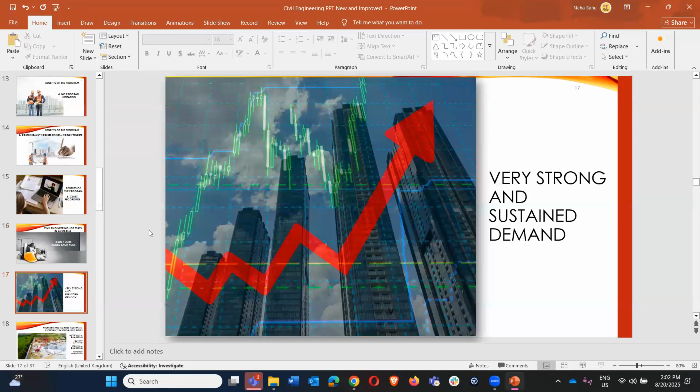Now we are going to the most important part of the presentation. Speaking about potential job opportunities, civil engineering in Australia is experiencing robust growth, driven by major infrastructure investments and ongoing urban developments. The sector also adds about 4,000 new jobs each year, according to my research while preparing for this presentation. This clearly reflects a strong and sustainable demand for professionals in this field.

Civil engineers are in very high demand across Australia, especially in specialized roles such as geotechnical engineering, quantity surveying, structural engineering, and transport engineering. Across Australia, the demand for civil engineering also varies by state and territory, closely linked to the scale and scope of ongoing infrastructure projects.

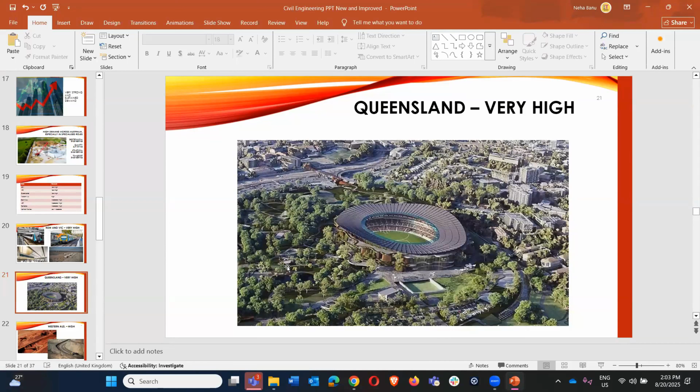In New South Wales and Victoria, there is very high demand, driven by massive developments such as the Sydney Metro, the Western Sydney Airport, the Melbourne Metro Tunnel, and the Suburban Rail Loop. In Queensland, there is also very high demand, fueled by the infrastructure boom and preparations for the 2032 Olympics. And in Western Australia, major investments in regional roads and mining infrastructure are also contributing to a high demand.

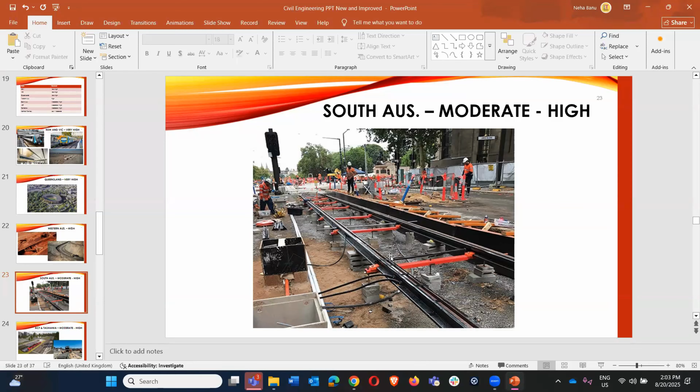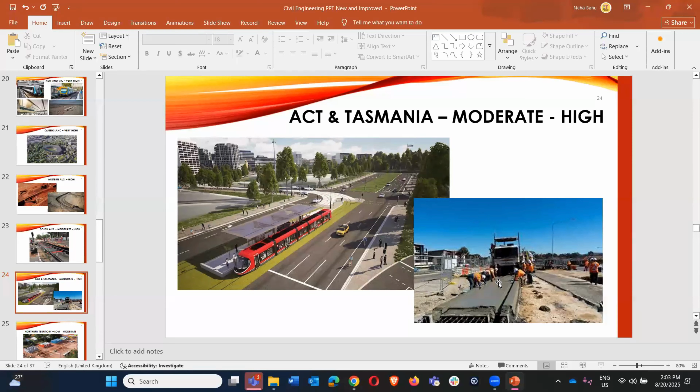In South Australia, there is also a moderate to high level of demand, thanks to ongoing urban renewal and transport upgrade initiatives, especially in Adelaide. In ACT and Tasmania, there is moderate demand, mainly supported by projects like the Canberra Light Rail and regional bridge works. And lastly, in the Northern Territory, there is low to moderate demand, attributed to smaller scale infrastructure efforts shaping the marketplace in these areas.

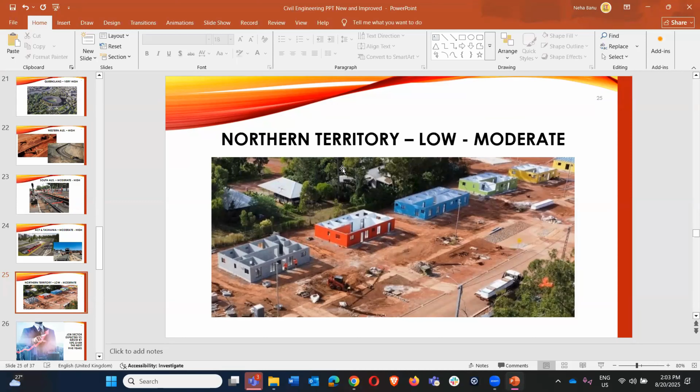Civil engineering is among the highest paid engineering fields in Australia, especially for experienced professionals involved in large scale infrastructure projects. The sector is expected to grow by 10% over the next 5 years, providing a strong prospect for career advancement and skill development. Moreover, the sector is supported by ongoing government and private investments in infrastructure, which ensures continued job creation and sustainability.

Now we will be talking about why to choose Extratech. Obviously there are tons of free YouTube courses, Domestika courses, Udemy courses, even Skillshare courses. So in light of all this, why should you even bother with Extratech? That's a good question. Let's answer why Extratech is the best.

Number one, the curriculum is created by industry veterans. Our course is designed by experienced industry professionals who have in-depth knowledge of the field. The main advantage of this is that it ensures the program covers only relevant and up-to-date topics, providing you with practical skills and knowledge that are in demand in the job marketplace at present.

Number two, the principal foundation of the program is to help international candidates. The program's core mission is to support you. We acknowledge the unique challenges you might face in job hunting and adapting to a new working environment. Obviously, the international hiring process is completely different from the local job hunting process, and interviews and meetings are even harder. As international candidates, navigating all of this can be super difficult.

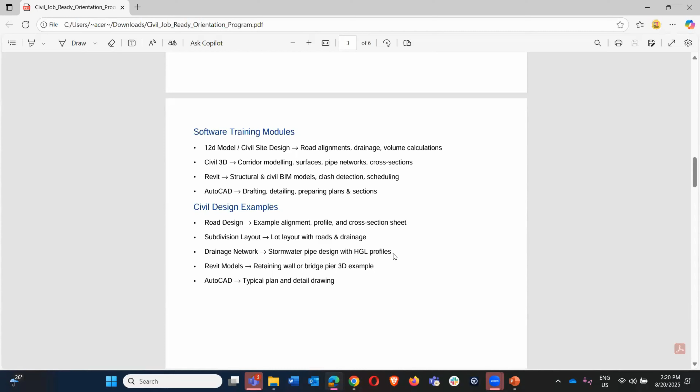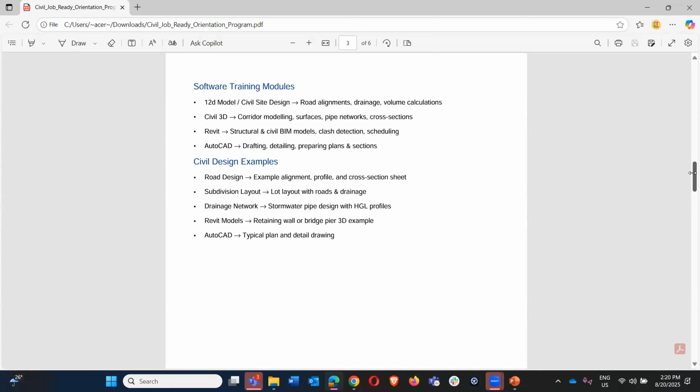Then there are project management modules. I'll teach you the basics of project management, both theoretical knowledge and practical application. The first one is work breakdown structures - how a work breakdown structure works.

Project scheduling, Gantt charts, cost estimation, resource planning, and how you can communicate and report using PMBOK guidelines. PMBOK guidelines are mostly used in Australia for project management, and we'll be learning about that.

We won't be physically using total station and GPS since we don't have that gear on site, but I'll teach you the basics so you have an understanding of surveying. As a civil engineer, you need to understand basics of surveying - not as a surveyor using total station and GPS, but knowing the concepts: how to set out, how to level, how to gather survey data, what surveying techniques and guides Australia uses, how to create surfaces out of points and break lines, and all those sort of things.

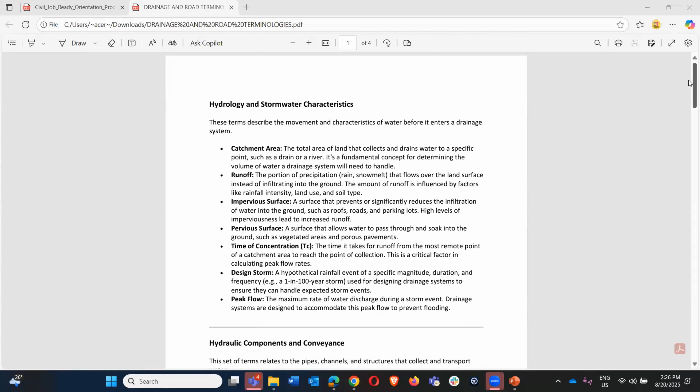Especially in road design and stormwater drainage design, these are the terminologies used. So catchment area — obviously what's a catchment area? It's an area where there's a specific low point where water drains, basically the lowest point where water will drain. So that's a catchment area.

Runoff, basically, is when water flows on the land surface instead of going inside the soil, infiltrating the ground, or seeping into the soil. It helps in the calculation of flow — that's what's called runoff. Runoff is calculated from the rainfall intensity, land use, and soil type.

An impervious surface is a type of surface where water can't infiltrate — basically a concrete surface, road, parking lot, all those kinds of surfaces are impervious. Water runoff is a lot more on impervious surfaces.

And what's a pervious surface? Obviously, it's the opposite of impervious, where water seeps into the soil. If you pour water onto soil or sand, the water gets inside there. So that's what's called a pervious surface.

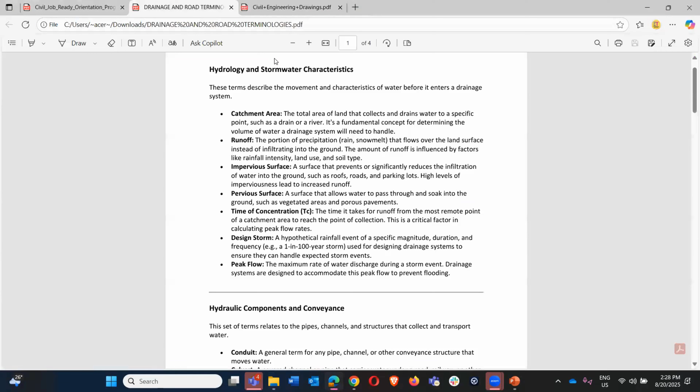Design storm — let me give you an easy example. Design storm is normally referred to as a 1 in 100 year storm, meaning one storm of that magnitude happens in 100 years. I'll explain this and then we can move on to the engineering drawing.

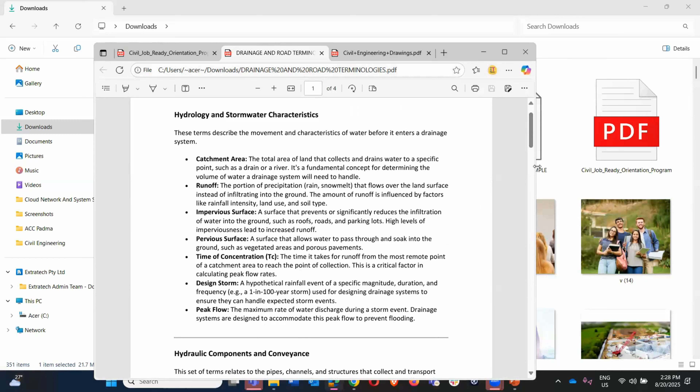So design storm basically means a 1% probability of having that storm. Before it was called 1 in 100 years, but now it's called 1% AEP — that means a 1% probability of having that much rainfall. So we assume that much rainfall will happen and design accordingly.

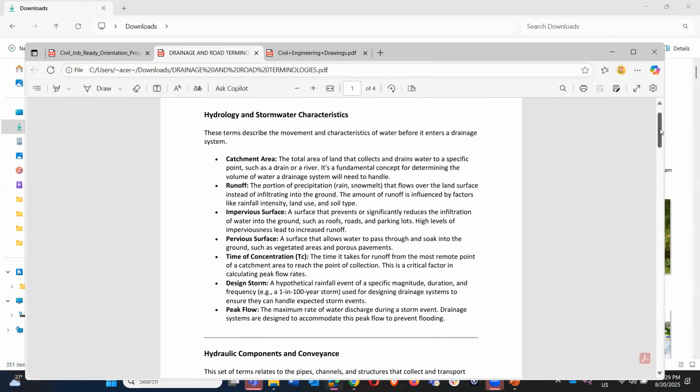And peak flow — peak flow means the maximum flow happening during a storm event. Okay, so yeah, those are the types of things we consider.

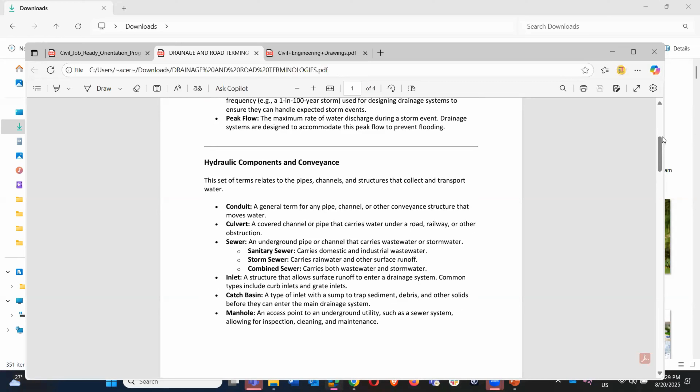Now a bit about hydraulic components. Conduits — I guess a lot of people know about conduits; it's a pipe, channel, or other structure which helps in moving water. A culvert is a type of channel or pipe — it might be a pipe culvert, box culvert, or other types — but it helps in channeling water under a road, bridge, or railway line, without obstruction, basically channeling the water.

And sewer — what's a sewer? Most of you know it's an underground pipe that carries wastewater, and sometimes it carries stormwater too. It's categorized into different sectors: sanitary sewer, storm sewer, and combined sewer — it explains itself with the name.

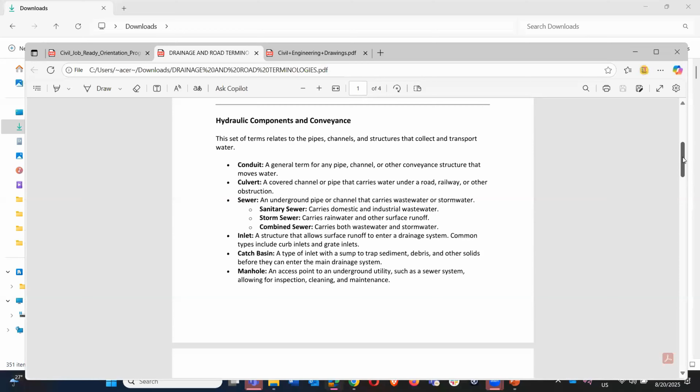Inlet — what's an inlet? It's like a pit where water flows inside and channels through to an outlet. And catch basins — it's a type of sump which helps trap sediments, debris, leaves, twigs, and other solid materials before water enters the drainage system.

Manhole — you've probably seen a lot of manholes, like round structures on the road or on the footpath. It's an access point that helps in inspection, cleaning, and maintenance. These are just quick examples; I don't want to go through all of them since there are a lot. I'll provide and explain more on this as well.

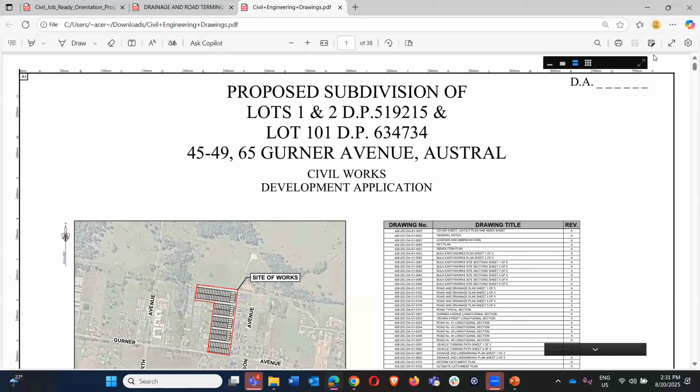But what we can do now is go into the drawings, and I'll quickly show you how it looks — basically how the design and drafting looks. So this is a subdivision layout, a new subdivision layout where a greenfield area has different lots built in it.

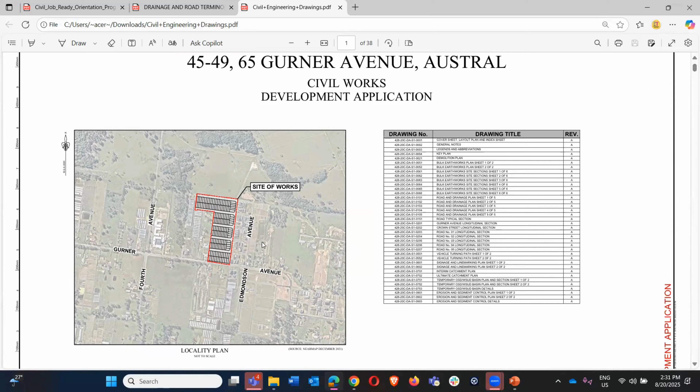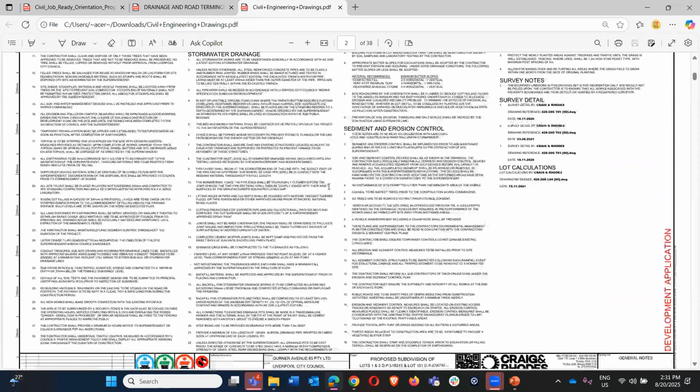So greenfield area means an area where nothing is there, it's just grass. If you go down, we can see here there are a couple of notes here. The first page is the cover page and the second page is the notes page, with notes regarding the project itself.

If you go down a bit, there are abbreviations and legends. These legends explain what the lines mean, what the labels mean, and all this.

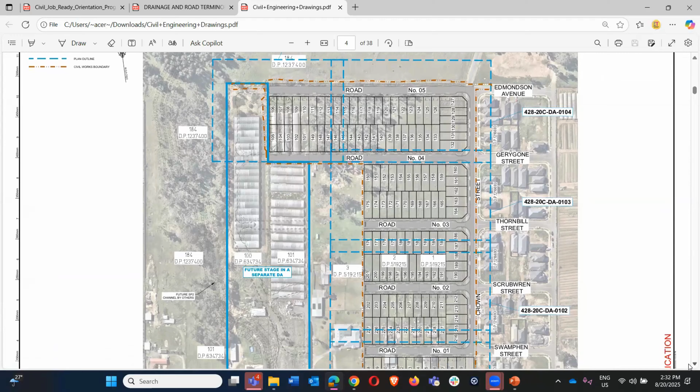Here on the fourth page, it explains about the layout. This is basically the general layout, divided into different stages. Each stage is built at a different time, so you can't build everything at once. That's why it's staged in different numbers, and you build it, as well as design it, at different times. So that's the stage plan.

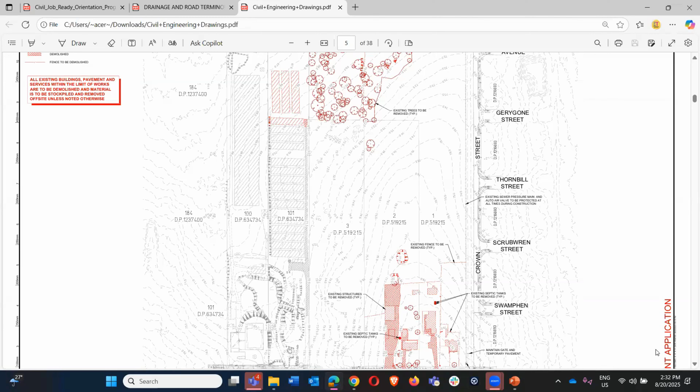This is the existing layout, a survey plan. You get all this survey data from here. You can see the trees, existing buildings, and the contour lines there. It gives you an idea of what's existing and how you can build new things there.

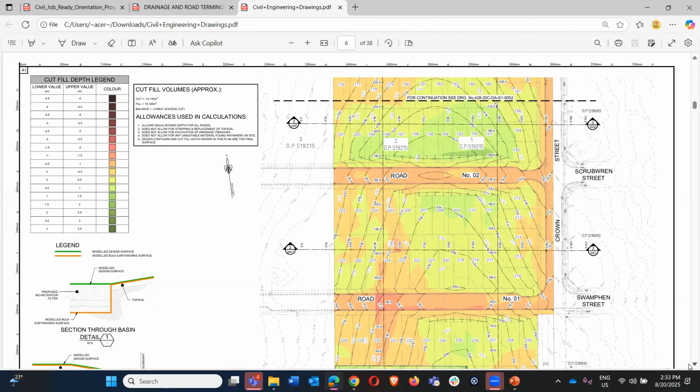If you go to the next page, this gives you a cut and fill area, cut and fill volumes. You can see the color there represents the depth, with upper value and lower value. According to that it's classified, and you can see the total cut, total fill, and the balance there.

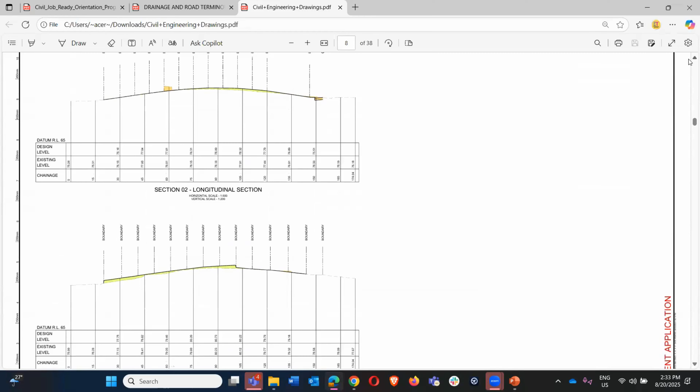If you go down, this is the same cut and fill page. If you scroll down, this is a long section plan. Basically you're getting a long section of a road itself, or a section, where you get all the details of the existing level and design level, as well as the chainage.

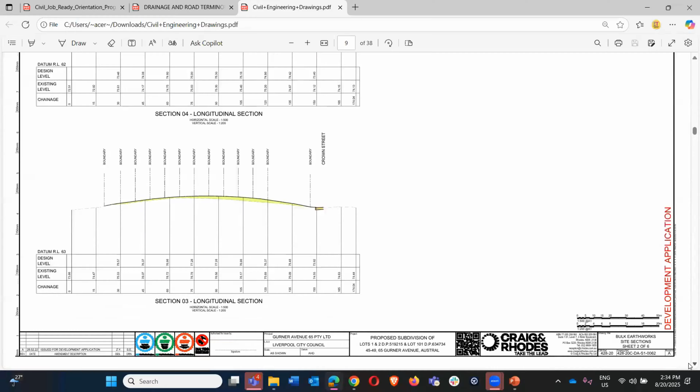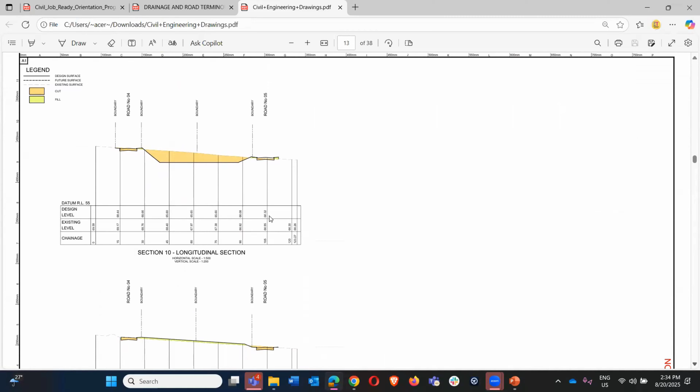That's also a type of long section, showing what's there. For example, here you can see the road, and then the detention basin, and another road there. That's one type of long section. Depending on different areas, there will be different long sections.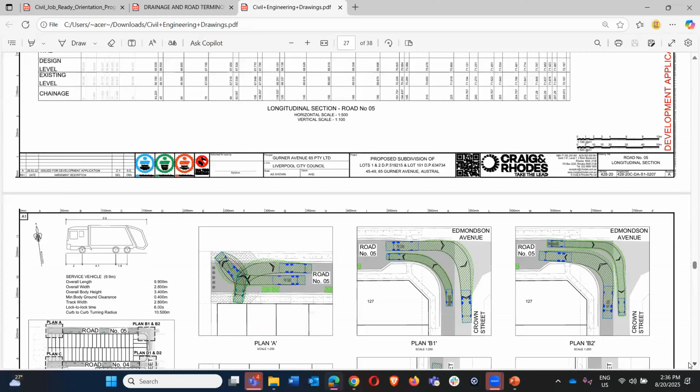If you scroll down a bit, these are vehicle tracking plans - meaning what type of vehicles can get inside the road. Each of these vehicles is different, some might be a bus, some might be just cars. You have to check that before building a road, since you can't just build a road without fitting those vehicles in. So these vehicle trackings are very important.

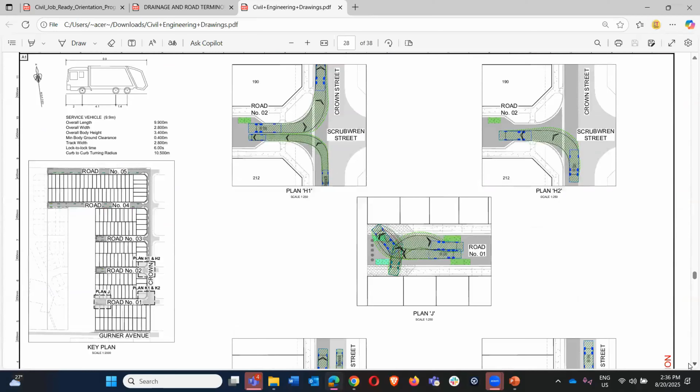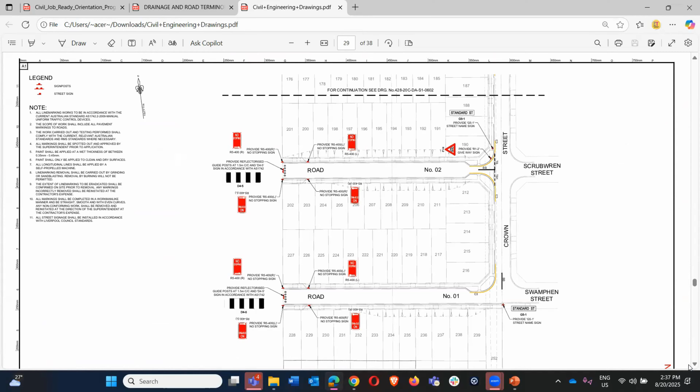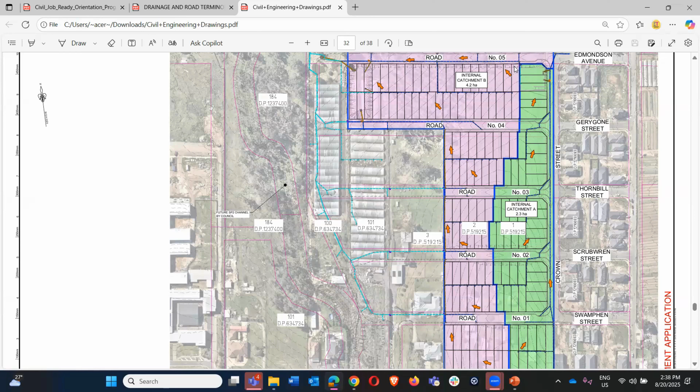So basically, we design it in such a way that all the water flows down into that detention basin. In the top right corner, you can see in the pink box - those are the detention basins, so all the water flows in there. We design it so that all the water flows in there, and the same goes for the green box - it basically goes into a pit near that area, and then joins into that detention basin. So that's what a catchment area is.

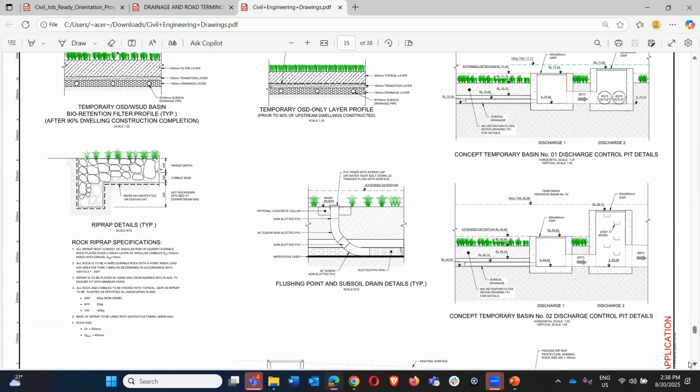If you go down, that's just a section of the detention basin - showing how a detention basin looks, what landscapes you need to put in, and the details of the pits and pipes. Discharge control pit details, basically the details of the detention basin. Yeah, same here as well, if you go down.

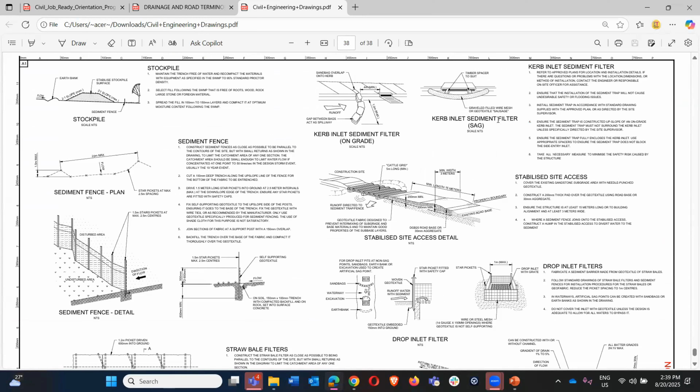Those are just sediment and erosion control plans. These are all details of what's used in the field. You can see that kerb inlet pit there - those types of pits are used in the subdivision itself, along with what fences are used and what type of details are used. We have to provide that to contractors so they can use those details and build accordingly.

I think what I wanted to show you guys was just a rough overview of how a subdivision plan looks. Maybe a lot of people haven't seen a proper plan. So this is a development application. Basically, whenever you want to build something, you have to apply to council and give documents and information about what you want to build there. So you're giving an application, and this is just a part of that application.

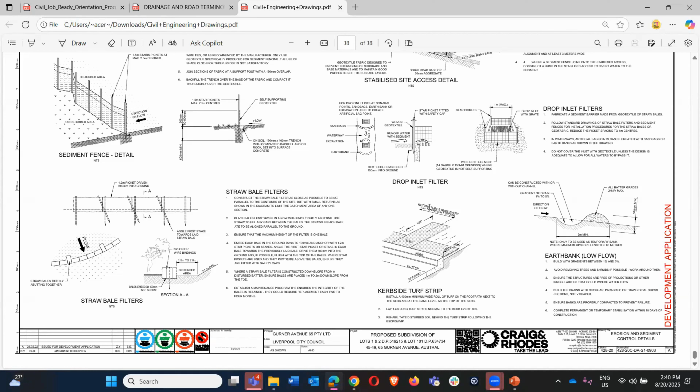So you're given a document, and there will be other documents included as well, but this is just the engineering document, saying these are the details of what we'll be building there. What council does is assess these plans to see if it's feasible, if it's within standards, and then approve it so they can build it. So that's how it works. I hope this was a bit informative.

Now lastly, I just want to show you one more thing. If you go into that standard - AS3500 - if you open that, this is one type of standard. There are different standards in Australia, and this is one of them, mainly used in stormwater drainage design.

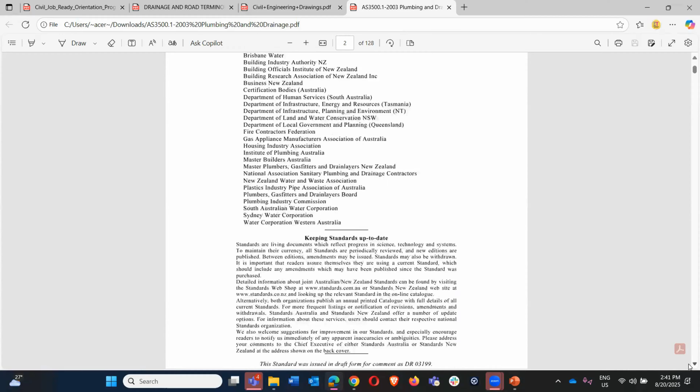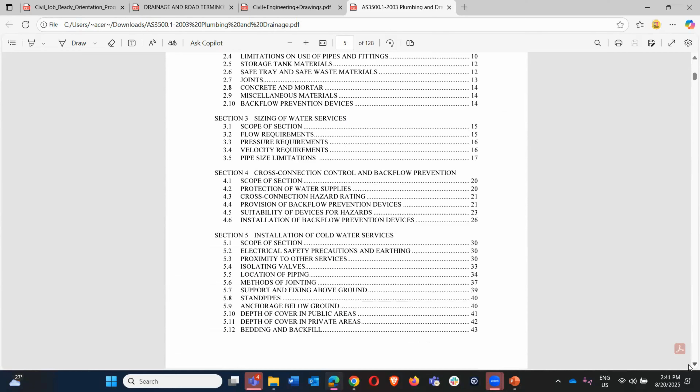If you go into contents, scroll down a little bit - yeah, you can see here, these are the contents. So it shows how you can size water services, what materials you use, what cross connections you can have, and what backflow you can or can't have. All these details are given here, and you refer to these kinds of standards to design it. Also, whenever you're constructing, you refer to these standards.

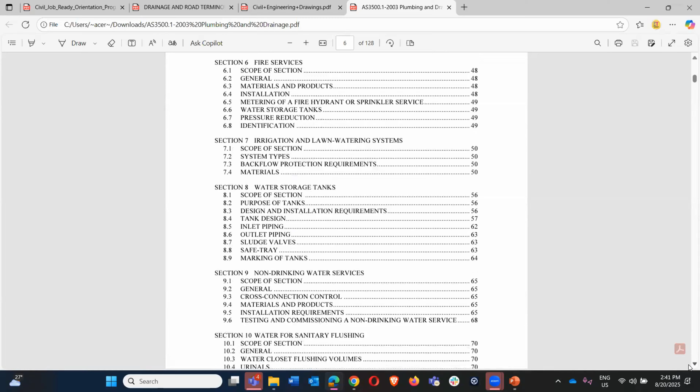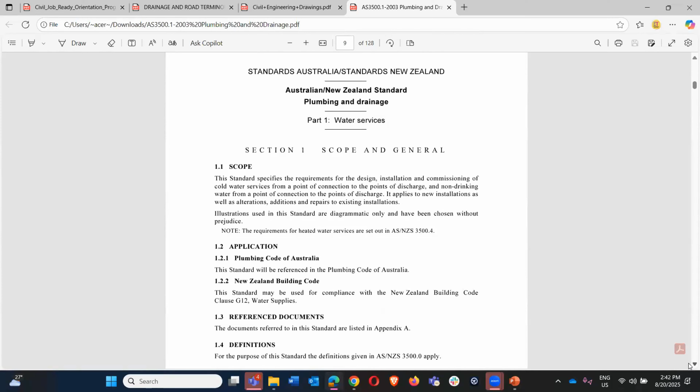So yeah, this is one type of standards. We'll just quickly scroll through. Just wanted to show you guys, because this is not a free document. If you're a student, you can get it for free, but if you're not a student, you have to pay for this and get a subscription to get these documents. Probably most of you guys haven't seen this, so I wanted to show you.

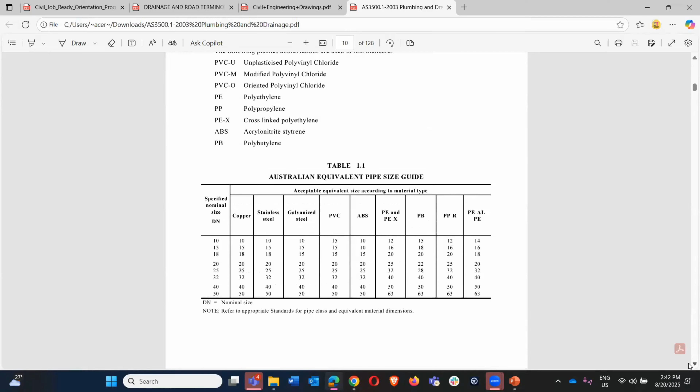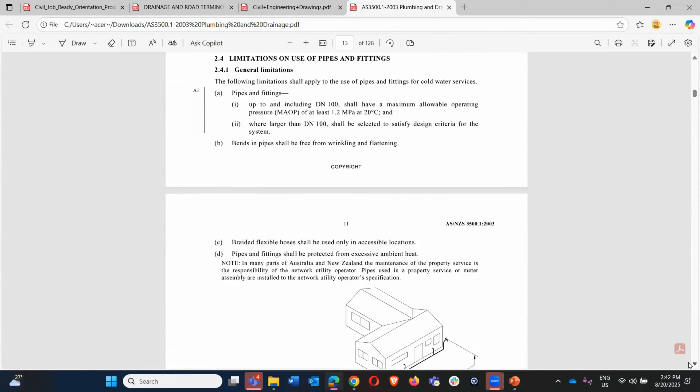If you go down, there are different codes that's used, different, it's a big document. I feel nobody will be able to remember this in one go, but once you're used to it again and again, you'll be knowing it. We'll just go through easily.

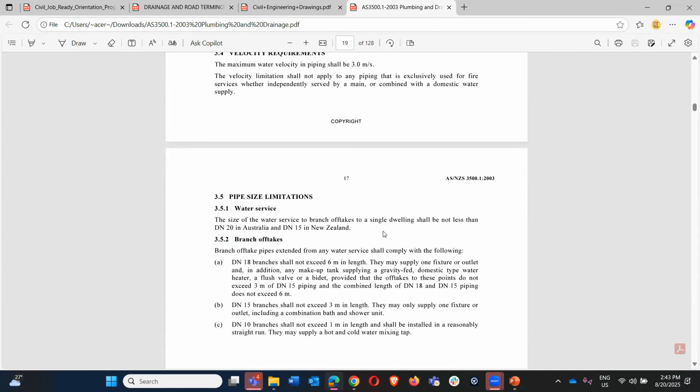You can scroll in the bottom now. There will be references and appendix, so these are the sections. For example, you can see there 3.5, 3.5.1. That's like a clause, section 3.5 and 3.5.1 are the clauses there. That's how you remember the things. You can scroll down in the bottom and we can see some appendix. Just go straight to the bottom.

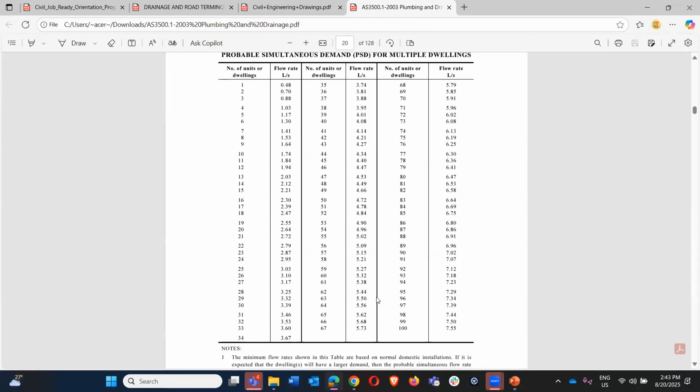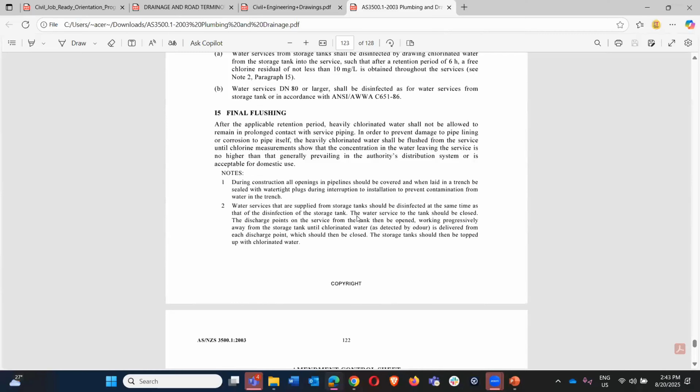Yeah, a little bit up. So yeah, you can see there some appendix there. So what amendment it has, and you can scroll up a bit. That's one of the appendix there.

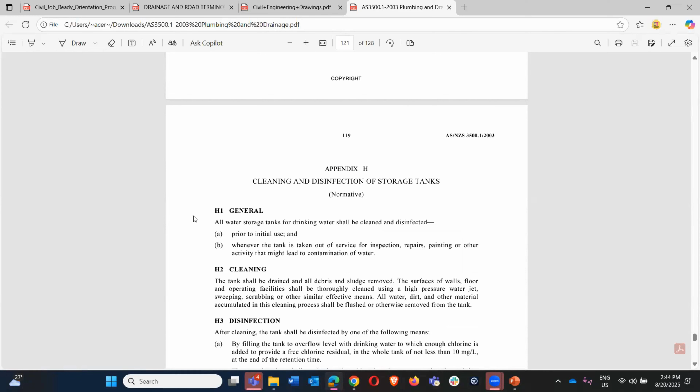So that gives general information. If you want to do any disinfections, if you go down a bit - there you go. You can see there cleaning and disinfection of storage tanks. So you get details of that specific storage tanks from here, how you clean it and how you disinfect it. So yeah, those are the information you get from the standards, and it helps you a lot.

We'll be learning about that more and more in our classes. I just wanted to give you a rundown of that, okay? So yeah, that's there. And the softwares we use, okay? So quickly, yeah.

For example, if you open that detailed survey plan, sorry, detailed survey CSV file, yep. So this is a survey file, okay? So basically, you get all these survey data from surveyors. These are point files, and then you bring them into this software, and then you create a virtual surface out of it. Basically, you mimic whatever you see on the ground, bring it into the software, and you design from there, right?

So first column is like the point number. Second column is X coordinate - you know how we learned in school like X, Y, and Z? That's what it uses here. So X coordinate, third column is Y coordinate, fourth column is Z, fifth column is just a description of what's there, and sixth column is the line number.

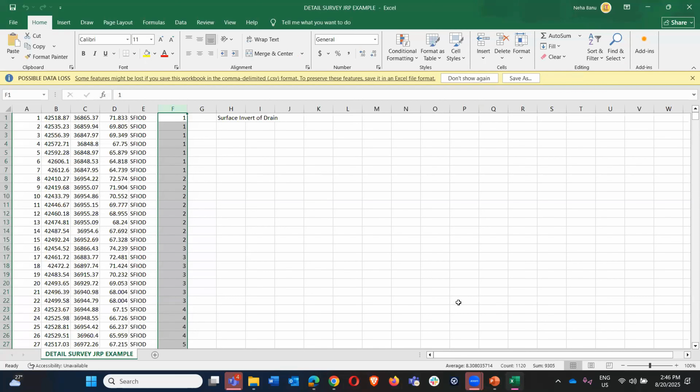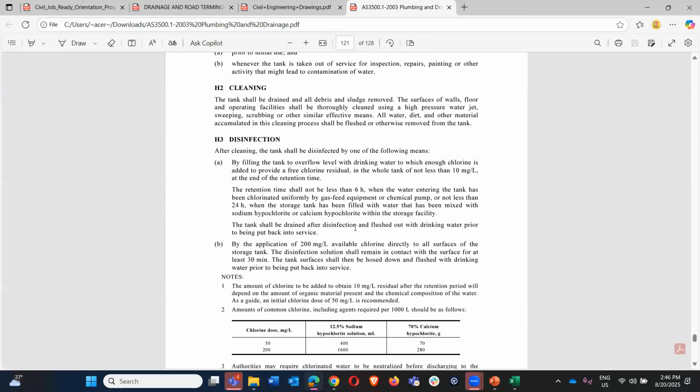What I want to share one more thing is the softwares we use. The most important one is 12D, and I think 12D is really helpful for you guys. It'll help you a lot in finding a job because a lot of companies need experience in 12D, since everyone's busy, so it'll be really hard for someone to teach you from scratch. That's why they want people to know the basics of everything, and that's what we are going to cover.

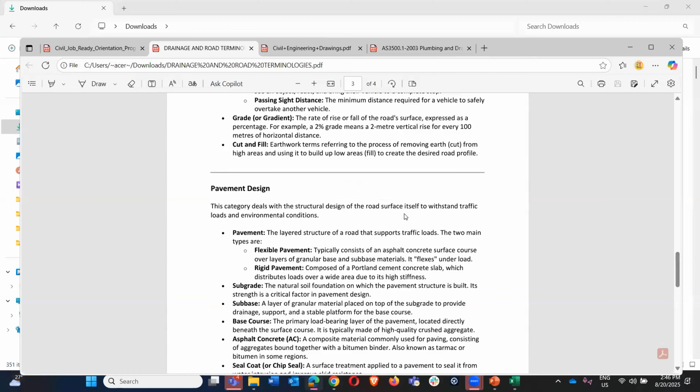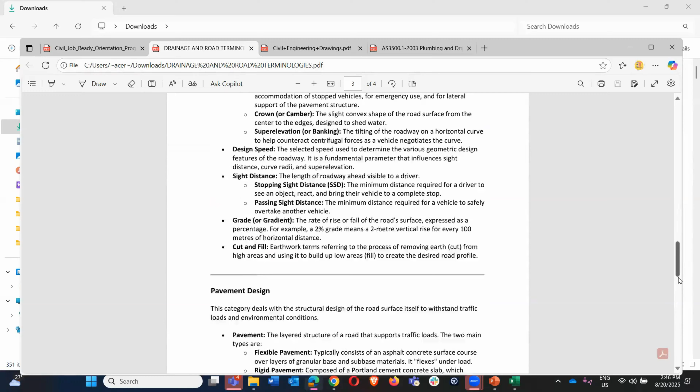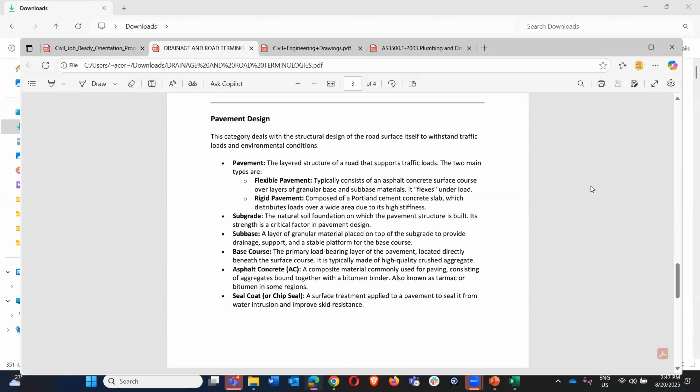I know this sounds like a lot of things here, but we're trying to cover as much as we can in a short period of time so that you have different opportunities in the market. You're not just looking at one area. If you focus on just structural, which most Southeast Asian people do - I feel like people from overseas degrees are more focused on structural, they just think civil is just structural and focus there, which limits their opportunity. That's why I want to teach drainage, stormwater, road design, and structural as well.

That gives you a wider range of job opportunities, right? So I want to focus on that, and I feel I want to help you guys achieve your dreams as well. I was in the same place before, right?

So I understand how hard it is not getting a job. But before we move on to these slides, I just wanted to ask if you guys have any questions about the softwares we learned, Australian standards, or anything at all.

Hey Mitch. Hello, hi, I got a question. Is it enough time to learn all of it? Like all the softwares and everything? See, we're not going into everything in depth, so you don't even need that in depth.

What we are going through is the basics, so you understand the overview of it, and then you can do things, right? That's what makes you capable for entry level jobs. If you're applying for mid level to high level jobs, obviously you need detailed information. But if you're going into entry level jobs, these surface level informations, and the industry knowledge things I teach, will help you a lot. So we can cover most of these.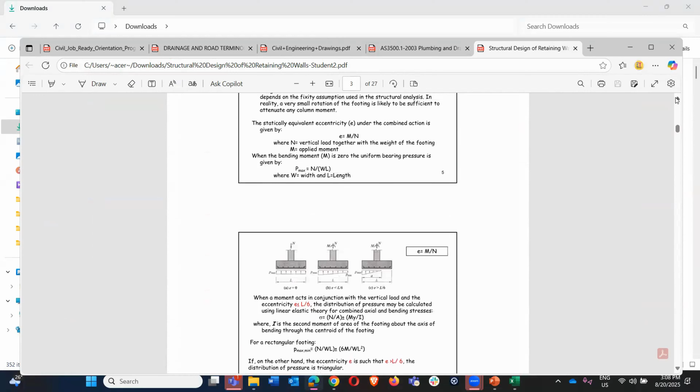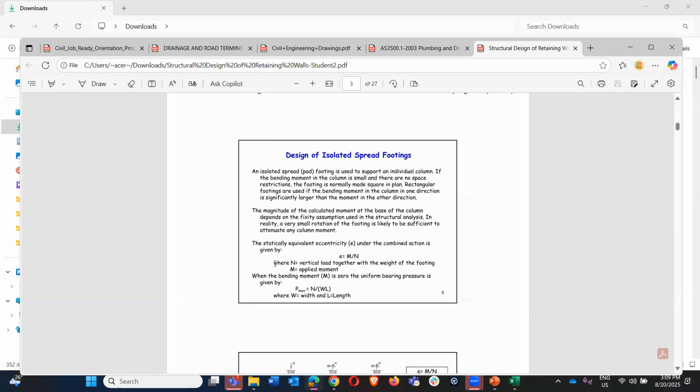Yeah, there, yep, there. So basically I have all these notes here that explain things. We won't go through all of them, because it's all theory and we don't have time, since we want to focus on structural and practical things. So what I can do is provide you all these notes and guidance, explaining where you can get things, from which standards, so that you yourself can design it.

And nowadays you need this theory knowledge to understand the software knowledge as well. We'll be doing it in software, but you won't be able to understand how it's done, so that's why I'll be providing these notes to you so you can understand the process.

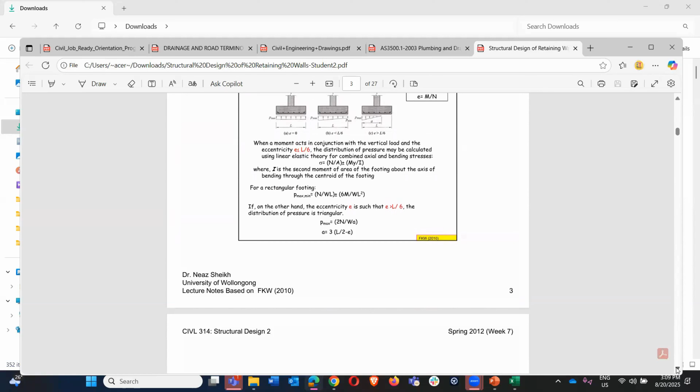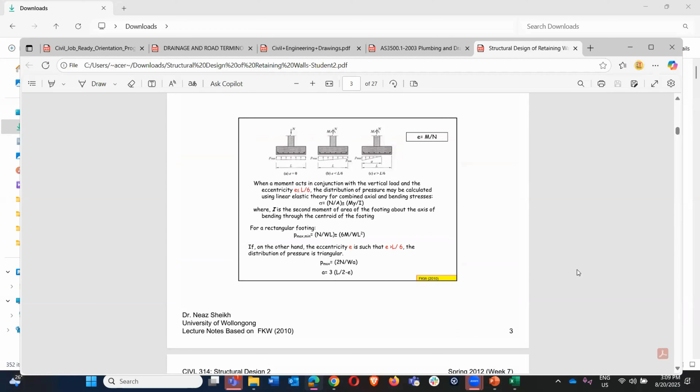For example, here you can see how to calculate P max and minimum, meaning soil pressure maximum and minimum in footings. If eccentricity is 0, you use that formula. If E is less than L by 6, length of the footing divided by 6, then you use that formula. All this information will be provided, and these were all collected by me myself.

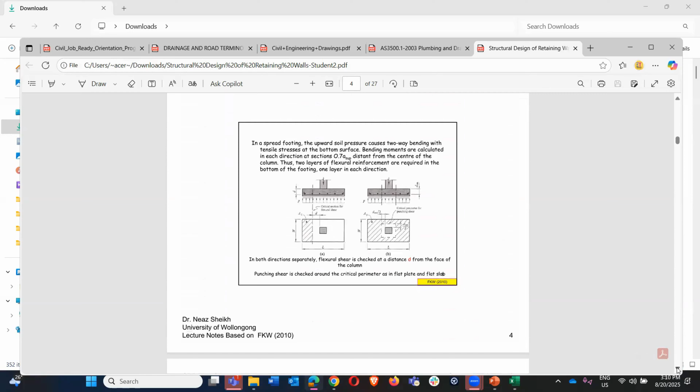I've been collecting these things since my graduation, since my university level, so it's good access to information, and you can't get these types of information anywhere else. Is that making sense? Is it a bit clear?

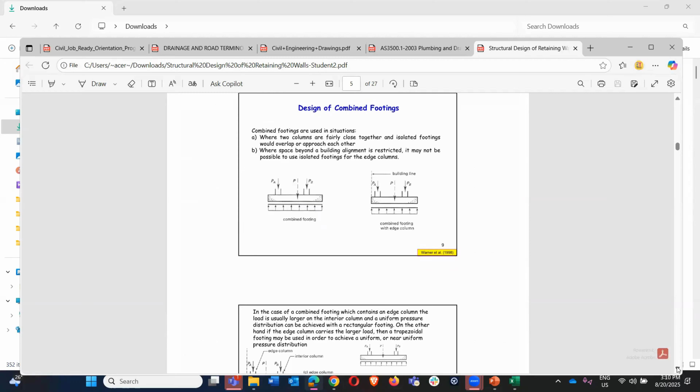Yeah, it's about footing. What about timber, what is that called? Timber as well, same thing - timber design, and also this footing design, retaining wall design, timber design guides, portal frame structure, and steel design guide as well.

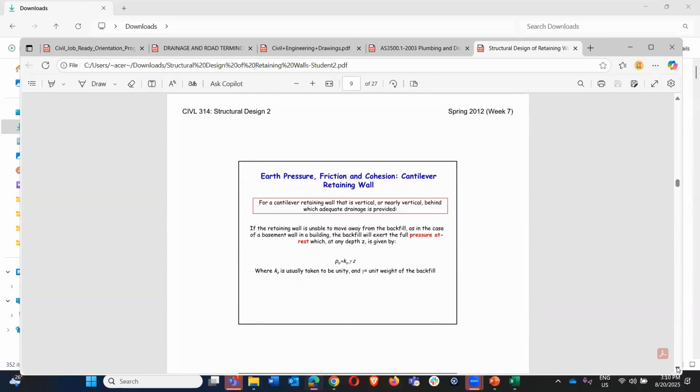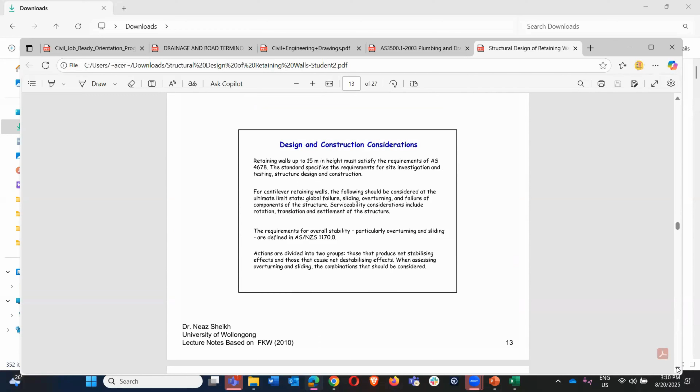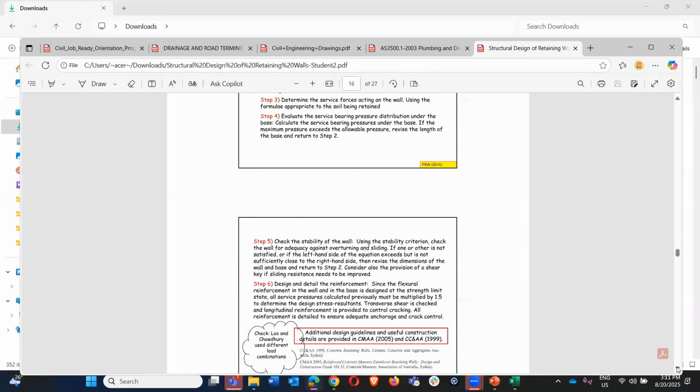I'll be providing those details to you, but we can't go through the theory part, it'll be a bit hard. Also, they don't expect you to know all these things as an entry level person, they just expect you to know where to find information. I feel if you do one or two exercises from here, you can get a gist of how to calculate loads, where to find information, which Australian standards to look through, all those kinds of things.

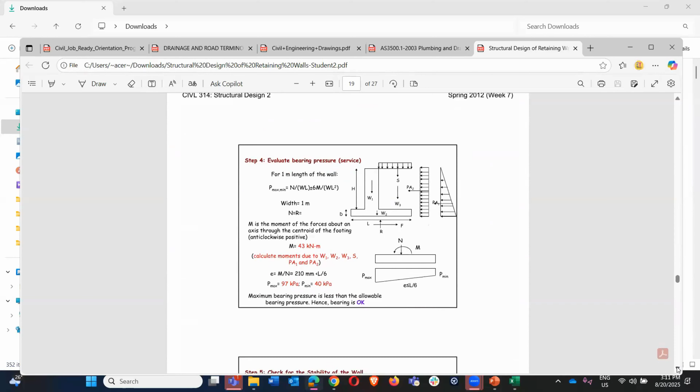Here you can see tutorial solutions. This gives you an idea of how things are done, how loads are calculated. This is for retaining wall, but for others it will be different - well, it won't be that different, calculating loads and everything will be the same, it's just the process that will be a bit different.

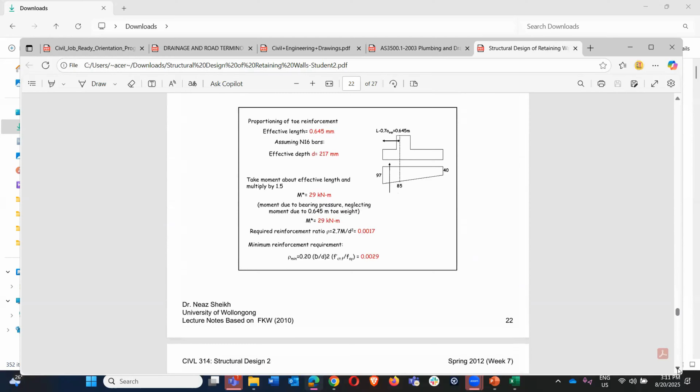The timber one is also, I think, going to be included in the curriculum as well when we are teaching. So does that answer your question, Shiva? Okay, is there any other questions anybody else would like to ask?